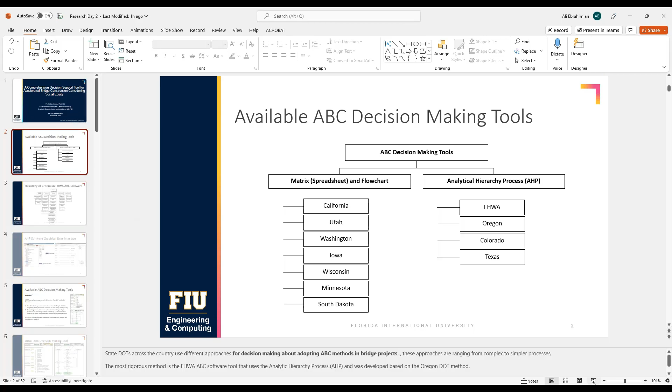So as you see, Dr. Ebrahimian, sorry, we are still seeing the cover of the presentation. Oh, okay, the PowerPoint has not advanced. What do you see now? Right now, nothing. I think Ali is going to give you again the... Okay, so yeah, I'm going to... Okay, so if you can just share again. Okay, sure, what do you see now? We are on the second slide, right? Okay. So do I need to switch? Yes, okay, yes, all right. What do you see now? The second slide. Okay, great. So yeah, and do you see the third slide?

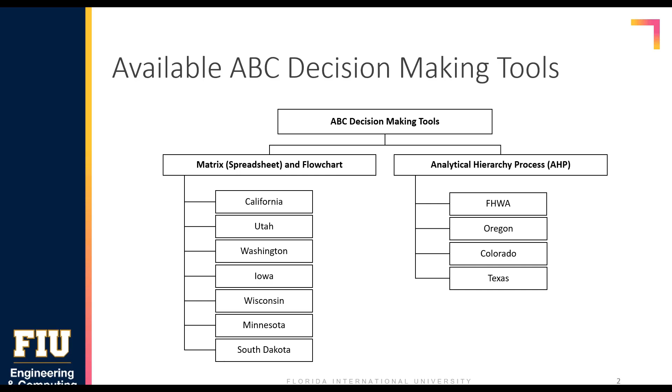So as you see, this is kind of time consuming, and a lot of state DOTs are looking for simpler approaches to be more practical in their applications. There are other, simpler methods being used by other state DOTs such as Utah, Iowa, Wisconsin, and Minnesota. Those generally use spreadsheet tools, based on simple multi-criteria decision-making methods, complemented by some qualitative analysis using flowcharts.

To give you an example, you see the Utah DOT method here. UDOT basically uses a two-step process. The first step uses a spreadsheet with a simple multi-criteria method, based on simple additive weighting or a weighted average method. In this step, they calculate an ABC rating score based on 8 different factors or criteria, such as average annual daily traffic or delay or detour time in each project, and they calculate a final score between 0 to 100 for each project.

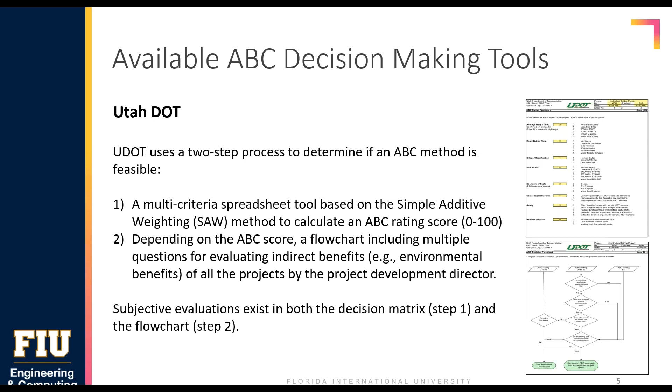0 means absolutely no ABC, 100 means for sure go for ABC. Then in the second step, depending on the final score of each project, they go through different routes in a flowchart that you see a screenshot of here. In this phase, they evaluate other indirect benefits, such as environmental benefits of ABC. But one thing that should be noted is that there are a lot of subjective components in both of these steps, and this is one thing we're really hoping to improve in our improved tool.

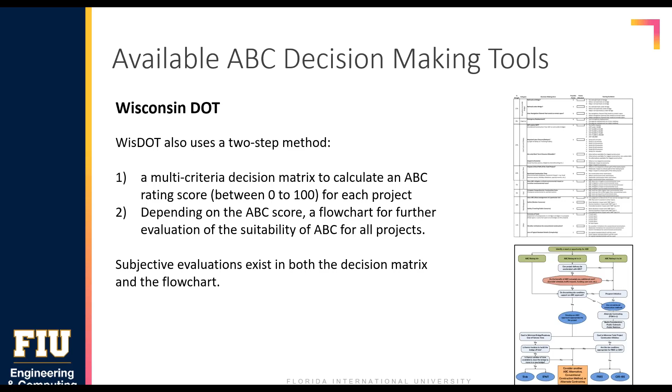Wisconsin DOT uses pretty much the same approach, of course with different criteria and a different flowchart, but the general approach is the same as UDOT.

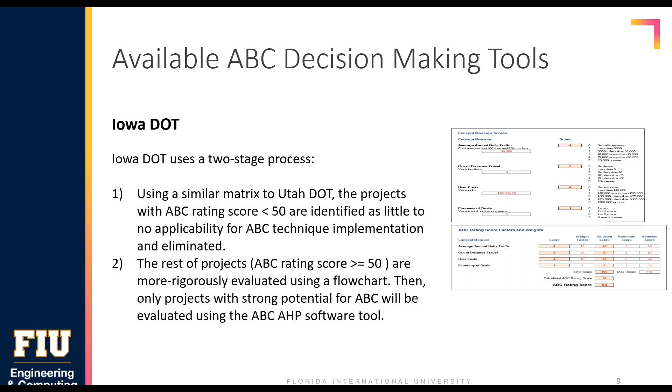Iowa DOT uses a two, or basically three-stage process. In the first step, they use a similar tool to UDOT and calculate a final score for each project, then eliminate the projects where the score is less than 50, these are projects that are not good potentials for ABC techniques. In the second step, they only look at projects with rating scores equal to or greater than 50, and go through a flowchart for more evaluation. Finally, they select some projects that look like good potentials for ABC methods, and then use the FHWA AHP software tool to calculate a final score for each project.

So Minnesota DOT, or MnDOT, uses a 3-stage process for determining the suitability of ABC.

In the first step, that's like an initial screening, and they use some criteria, mostly quantitative analysis. Then they pick the projects with a final score greater than 60, and do some qualitative evaluations. In the second step, the qualitative evaluation is done by the district project manager only.

Then there are some projects selected through the second phase. In the third phase, further evaluations are done on the project, but this time by the district project manager together with the district bridge engineer and traffic engineers, and probably other related units.

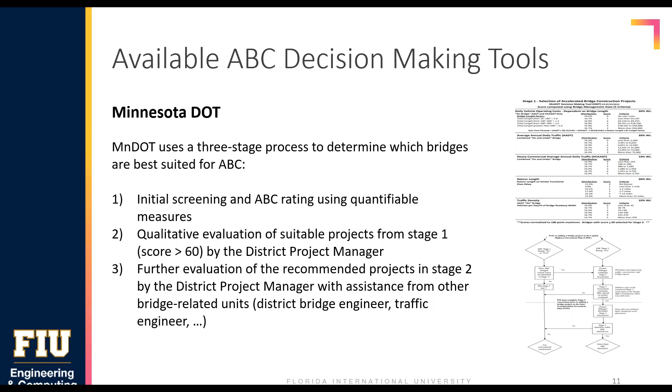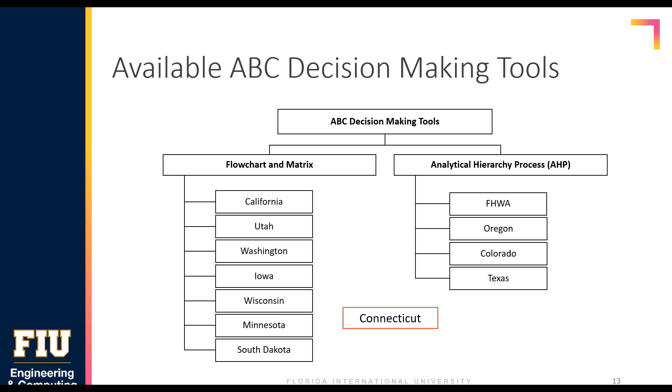So as you see here, the complexity of the methods differs across state DOTs. Connecticut DOT is basically using a middle ground approach. The method used by Connecticut DOT is actually a 1-step method.

That's just a spreadsheet tool that uses the weighted averaging method. In that case, it looks simple, but it does consider a lot of important criteria, and that's why this is kind of a well-received method.

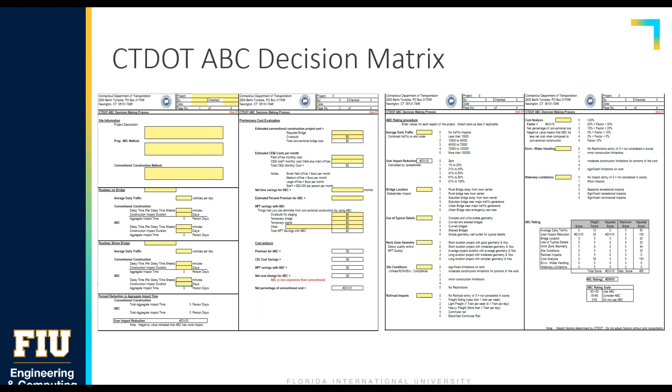This project is basically about improving this method. We're trying to see how we can improve it. So let's have a closer look at the details of this method.

First of all, this is a spreadsheet tool, and we are comparing 2 alternatives: one is ABC, the other is no-ABC, or conventional methods. The method uses 10 different criteria, as you see here.

The criteria include, for example, average daily traffic, which is pretty much in all the methods. But this method does consider the cost of conventional versus ABC method, also the time saving or user impact reduction from ABC methods, together with other construction limitations from the work zone and things like that.

So those are the criteria, and they are evaluated based on a score of 0 to 5. That's mostly a qualitative evaluation that has to be done, although some of our input data are quantitative, such as the ADT, average daily traffic.

Then we consider weighting factors to show the relative importance of each criterion. These factors are predetermined, meaning we cannot change them through the process.

As you see in this picture, time saving through ABC and cost analysis are the two factors with higher weights, each having 30% weight here. Finally, the method uses a weighted averaging algorithm and calculates a final score for each project.

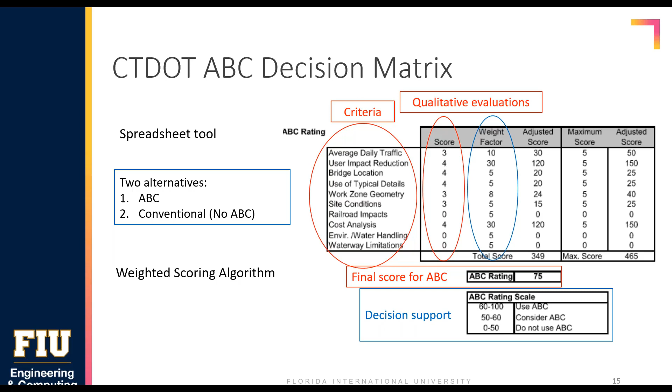In the final decision-making step, if the final score is between 60 and 100, that means go for ABC, or at least seriously consider it for your project. If your final score is smaller than 50, that means do not go for ABC. The method is basically vague when the final score is between 50 and 60, so it says further evaluations are needed.

So we have been thinking about areas where we can improve this method. The first thing we were asked to do with the call for this project was to include additional criteria, including safety of the work zone, or the potential benefits of ABC methods for reducing the risk of crashes in the work zone, together with other criteria related to social equity and environmental justice.

Then, currently the method is using qualitative evaluations mostly, so we were thinking how we can consider more quantitative evaluation of criteria instead of qualitative. Then determination of weights—again, these are predetermined weights, and that means they're not necessarily applicable to other state DOTs.

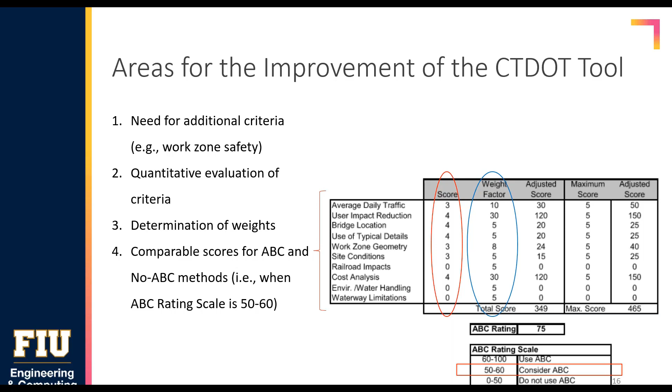And the other thing is, even within Connecticut DOT, if the decision makers change in that state, there's not a guarantee that the new administration likes to use this set of weights for the projects. So we are thinking about proposing a simple but systematic approach for determining the weights of criteria here. And finally, we want to add more clarification for when the final score is between 50 and 60.

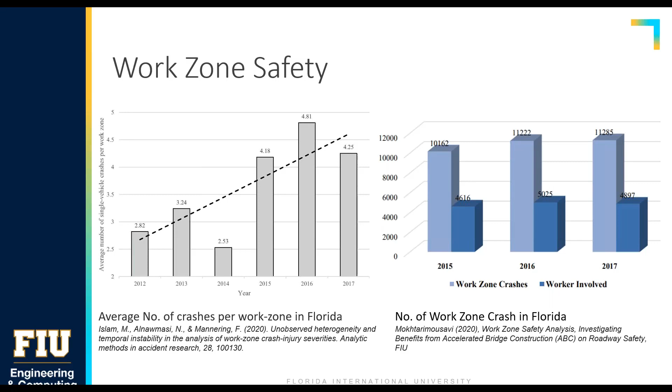So the criteria we are thinking about adding here is, first of all, work zone safety, or reducing the risk of crashes by using accelerated bridge construction methods. These are just some examples from Florida that clearly show the increasing trend of crashes per work zone, and the importance of this benefit of ABC being considered in the method.

The other thing is the direct implications of ABC on social and environmental problems. Looking at social factors such as population density and crime rate, we can clearly see that if you're working in, for example, a high crime rate area or a highly populated urban area, you can expect some interruptions to the bridge construction that can cause delays. By using ABC, we can reduce the chance of those interruptions.

More importantly, thinking about social equity, by using ABC we can have more public consent due to the reduced project time, especially in urban areas, and in some cases faster revitalization of, for example, low-income areas or high crime rate neighborhoods.

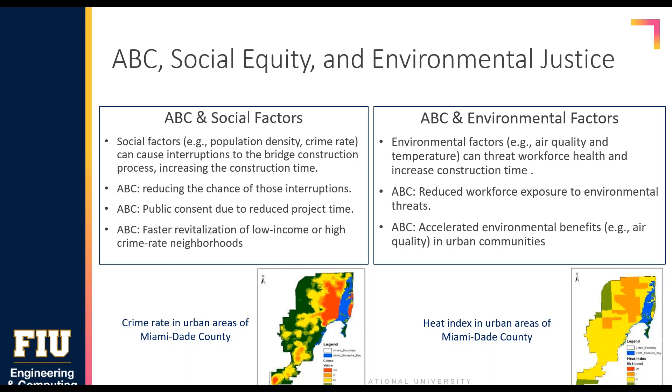Thinking about environmental factors, we can think about bad air quality in some areas, or extreme heat, which is a really high concern, at least in some areas of the country, including South Florida, where we live.